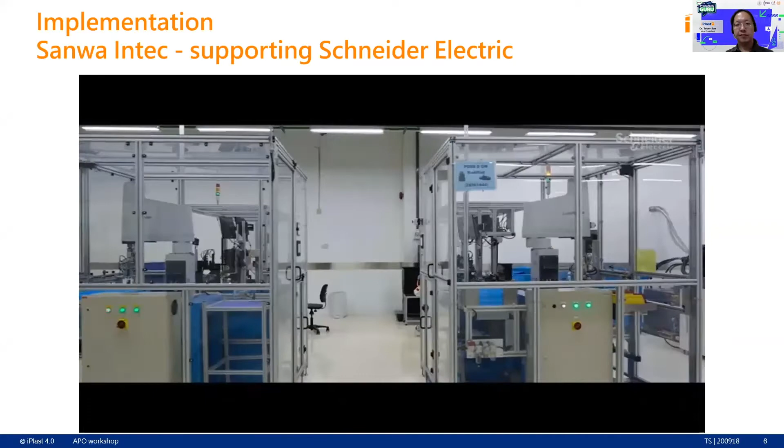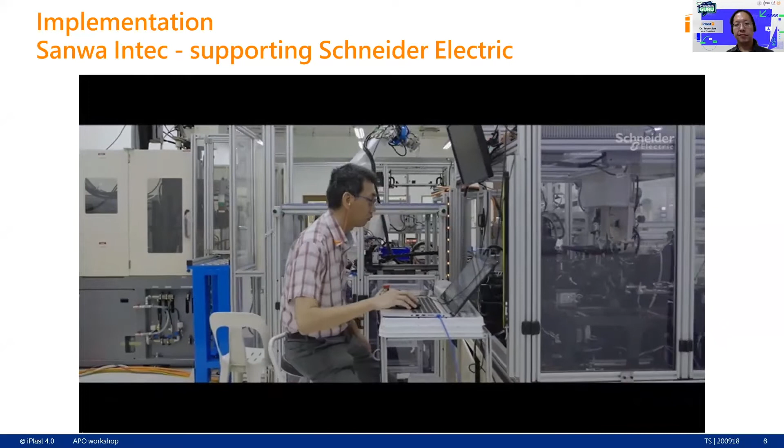I picked Sanwa because, just like BKF, Sanwa is another company supporting the automotive industry—they make automotive connectors. I show this video to demonstrate that although Sanwa is also an SME, the technology and everything behind it is very crucial.

If you look at their production, it's not a standalone injection molding machine—it's actually very integrated. They adopt the concept of a production cell, which is why you don't see a single machine there. The center of each production cell is actually the robot, because Sanwa took on the challenge of bringing in automation at a very early stage while building their production line. The experience we learned from Sanwa is also instilled in this project with BKF, which is why the Sanwa case is very important to us.

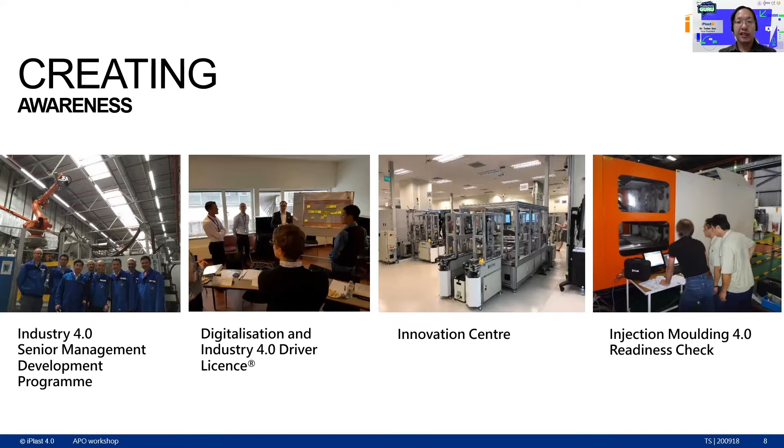So we put the readiness check at the end, because we want them to first know the basic scientific molding knowledge. After knowing that, they can go on-site and help our experts find out what's really the problem. In the BKF project, we've also been doing some readiness check, which I'll talk about later.

Usually when we talk about readiness checks, a lot of times it's very generic, not focusing on the injection molding industry. But everyone in the industry must know this requires a lot of domain knowledge expertise, because when you're tuning the machine, usually the machine won't tell you what to do.

There's no book to follow, there's no software to follow. The only thing people always come to is go to seniors, asking what should I do about this or that, because you rely on their experience. So this industry relies heavily on experience, quite unlike other industries.

So for us, leadership and organization come before technology, which is actually at the end. Of course we need technology, but actually most of the time, maybe 80%, when we're molders dealing with day-to-day problems, the first thing we do is find an expert, an experienced senior, to tell us what to do.

Also, most of the time you need to go to your boss, your superior. So that's why we think a proper leadership plus a very transparent organization should be even more important than technology itself.

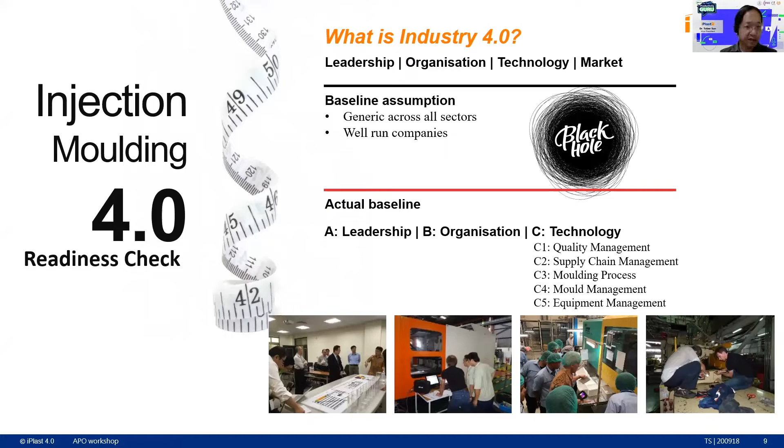So to learn about people and know about the organization, later on we will do trainings, like we said. We have two tracks we built on our own. One follows the SkillsFuture Singapore, like a skills track, so we have one for skills and one for career.

A lot of times people find that youngsters don't step into this industry because they cannot find a smooth career track. Are they going to stay on the line being a technician forever? If that's the case, and they have some ambitions, they won't go into that. But if we don't do digitalization, probably all they see is that right now they're the machine owner, and they become factory owner, and then maybe general manager.

But if we bring in the ideas of digitalization, they can have a lot of different career paths to choose. They can do a lot of smart maintenance. Why can they do that, even if they're not from a mechanical or electrical engineering background? Through proper training—and to be honest, a lot of times now maintenance doesn't require so much knowledge about mechanical or electrical systems.

So with the proper training tools and a very clear career path, we're hoping to bring more new blood in. By having a learning factory and a learning track within iPlast, we hope these two can help improve a lot of business things.

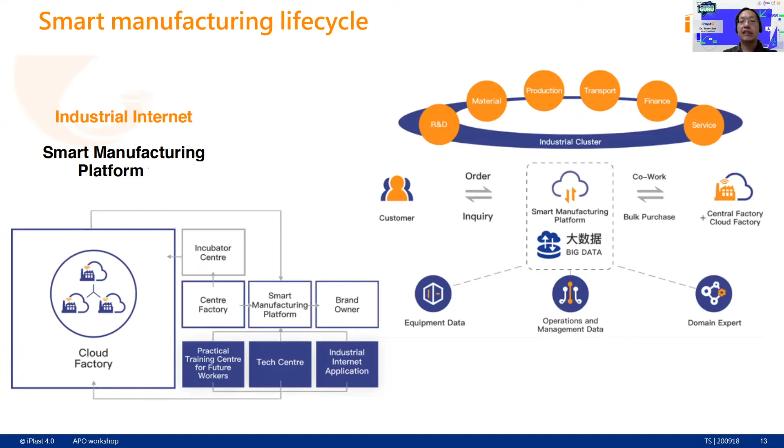Following this, we are building up our own factory. It's like a household shared factory. If you have an order, you can just come to us, and we think about how to fulfill your order. If you have equipment that is not currently in use, sitting there doing nothing, we help you get the order.

And if you are a financier, you have money but you don't know how to spend it to get profit, then we let you know how to invest in this platform and get your profit. This is what we've been doing in China. We're experimenting with this right now.

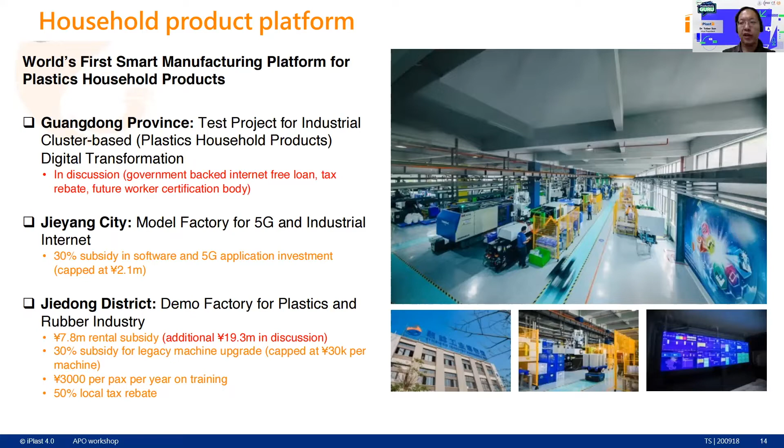But actually, for these 2 bosses, they are in very different positions, but the common goal is the same: they want to bring digitalization into their company. You can have one luxurious approach, and you can also have a 1-screen approach. Both methods will all help the company grow, of course, in different ways.

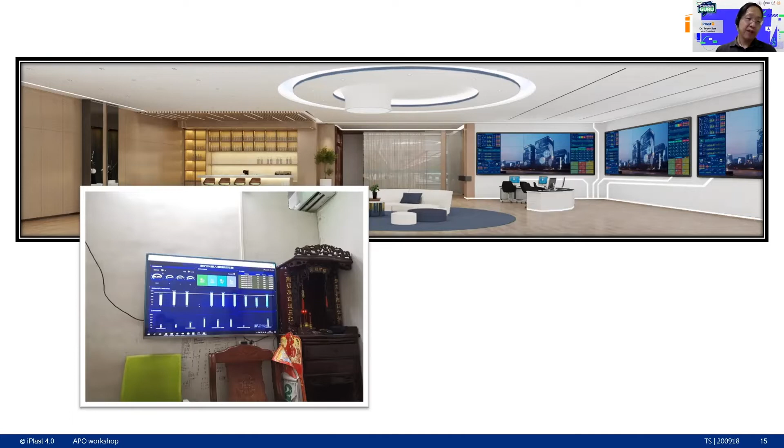So here's a short video of that platform that we're trying to build.

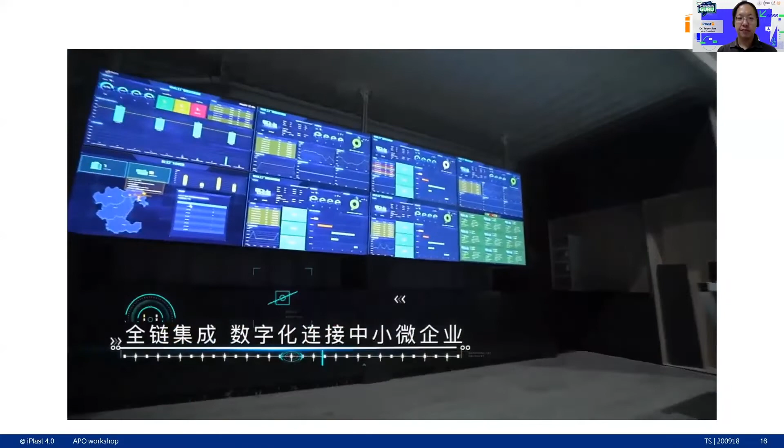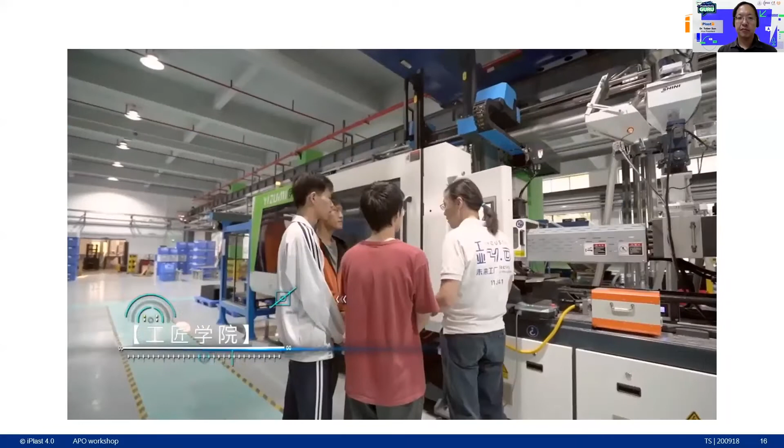So then pretty much you already have the idea of what can be done and what is the capability of the ecosystem. I don't want to talk about the company, because one company alone cannot do much. You have to have the ecosystem behind you to do that. Same thing about this project as well.

So here are the different missions, their jobs for different groups within the BKF project. You have APOs. APO is trying to find what is the expert in this area, so that it can assist with the demonstration project. So this is the job of the APO in this project.

And when APO designated iPlast, what we've been doing is having the consultancy and training in these areas. And of course, because BKF is using Engel machines, we find Engel as our partner together to support BKF. So we are focusing on software, and Engel is helping us with the hardware.

And since this is a demonstration project, the idea is to give an example, so that the local APO, the NPO, can have the understanding of how to distribute these successful experiences to other industries, to other regions. So for us, the most important group in this project is actually the FTPI, because later on, they will have this mission.

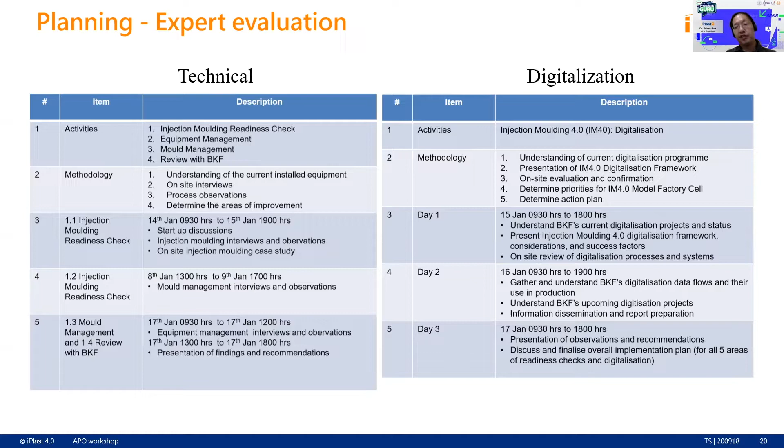So this is the first expert evaluation that we've been doing at the very beginning. Then what are our observations? Of course, the best thing is that BKF has already developed a lot of digitalization systems in-house, and they already have a lot of visualization boards.

Sometimes people think the board is only a decoration on the wall, which is of course very pitiful because they are not using the information inside. But sometimes it's because you are putting information designed for the managers - if you put it beside the technician, that's not designed for him. Of course he has no intention to use it because it won't help his work.

So it's very important to have the correct dashboard showing to the correct personnel. And also, good software can also send messages to the desired personnel, so the alarm signal is also very important. We all know about spam mails - if you receive warnings that aren't designed for you, that's no use, and people stop using it. That would be very pitiful.

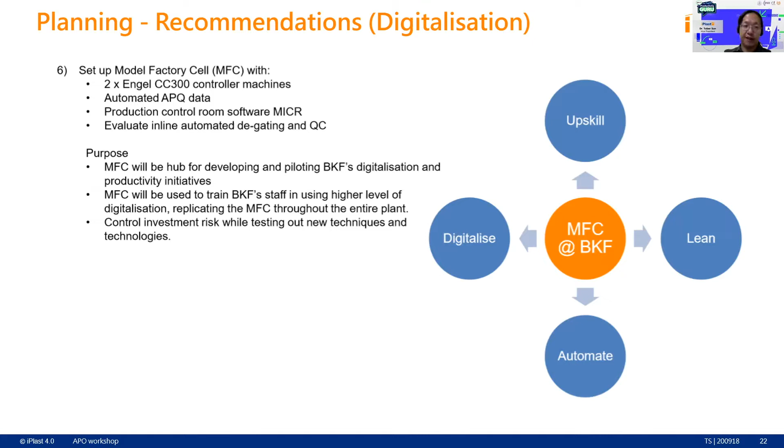And of course, when we talk about digitalization, we always need summarized information, because getting data doesn't mean anything by itself. If we understand what the data means, it becomes information, but most important is we want to use this information to achieve data-driven decision making, because the seniors need to make decisions based on that.

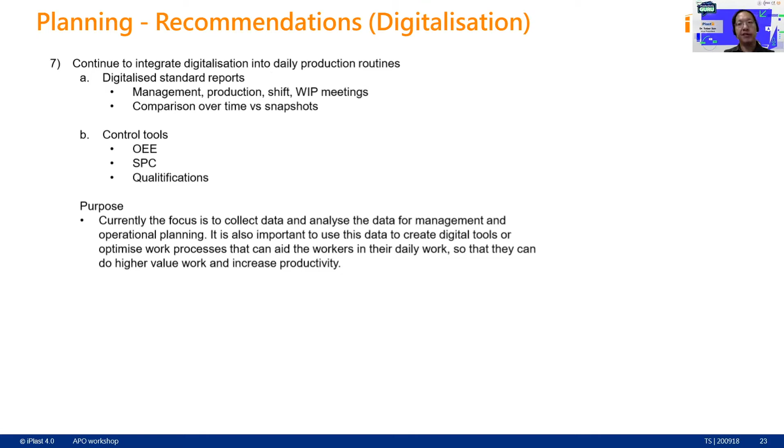So this is why we want standard reports for the management - how is the current condition of production? That is very important on this approach. Later on, by doing the readiness check survey, we understand what their baseline current stand is, and the baseline current situation until the ideal situation is what we are trying to approach with the action plan.

Separated by different subjects - scientific molding, what we should do about quality management, what we should do about supply chain, mold and equipment. Of course, at this stage, we pretty much focus on scientific molding and quality management, and the following things will be done one by one.

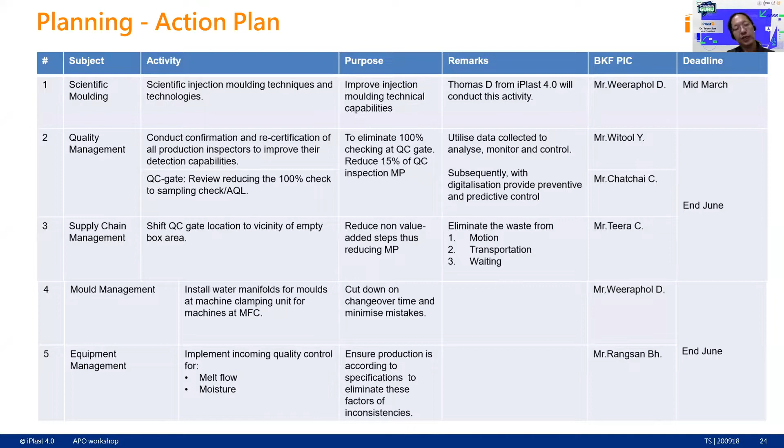Of course, today we talk about what scientific molding has already accomplished, and also the quality management. So for scientific molding training and digitalization, the final timeframe - this is not the plan, this is already the result from the past few months, about 1 year because of COVID. So things got a little bit delayed, but we still managed to finish training early this year.

Following that up, we are deploying the MICR, and through the usage and feedback from BKF, they have some added features for improvement - parameter syncing, and also inside BKF they have a lot of experience controlling the process with control limits. So that's another thing we do, to make the control limit setting a little bit better.

So we start with training, and we are trying to train the future workers. And why? Because if you want to do smart manufacturing, the machine won't operate on its own - you still need future workers to do that. So this is our goal, to do the training.

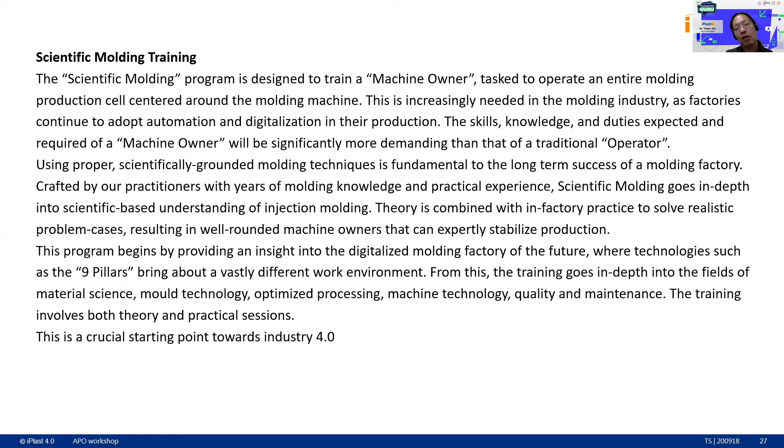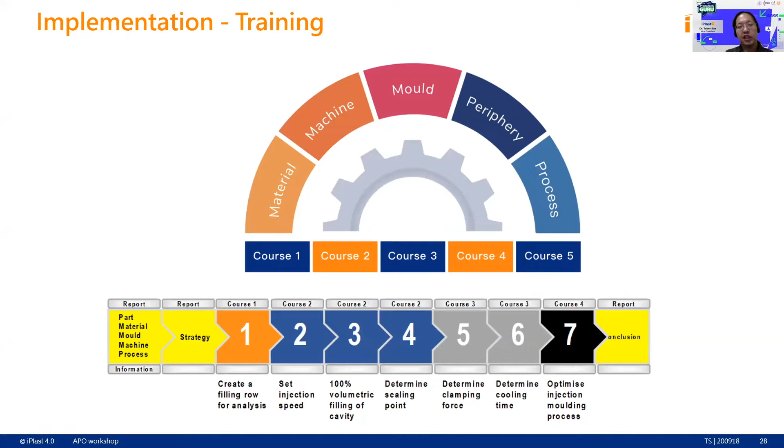He knows big and small about everything surrounding the machines to make it work. So we are trying to train a future worker who thinks of himself as a machine owner. That's the goal of our training. The training is composed of different categories, from material to process to mold. I won't go into the details, but it's separated into different courses, from easy ones to the difficult ones. Through the training, they already know when they tune a machine, when they change something, why they're doing it. They know the reason. So this is the idea behind this training.

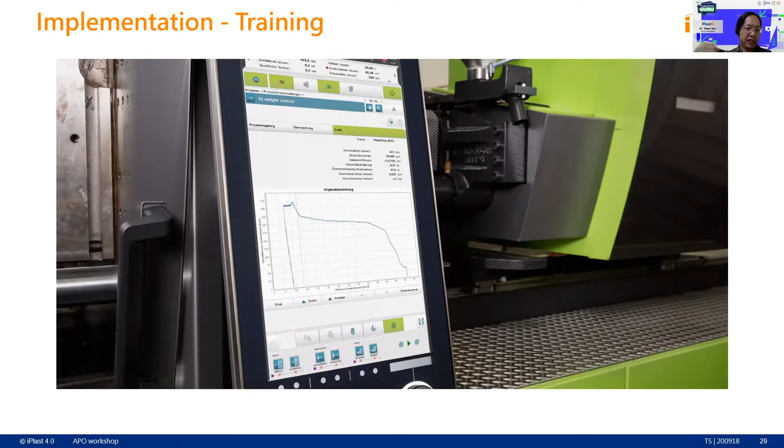So when we're doing the implementation, we take a look at the original built-up digital framework. BKF already has the material, their ERP system, and their quality control system. Our software is called Manufacturing Intelligence Control Room, and we pick up the first letters to become MICR. So the information is all gathered here.

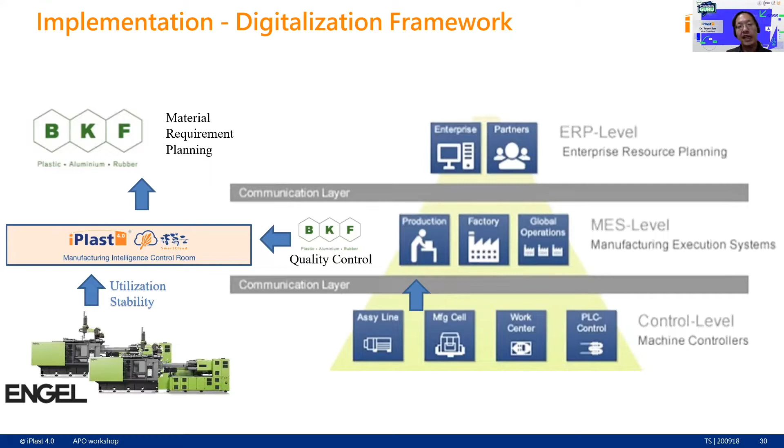So we talk about levels when we talk about digitalization. The bottom level is the control level — everything from the machine signals. The medium level is the MES level, where a lot of information is exchanged, letting you know the current condition of production. Then the ERP level is where people make decisions. On the top side is the BKF system, which they use to make decisions. The medium part is where they get the information. And we help them now also build up the bottom part, so they can have the fundamental machine information fed into their systems.

This is a very special thing we've been doing with BKF, because before, they already had a QC department with an operator. But everyone with a QC department knows you cannot do 100% checks on your molding machine — it's just too much. If you're doing selective checking, usually after molding, after 2 or 3 hours, you collect the part, then send it to quality control, do the measurement and testing, then feed back the results. By the time you feed back, you've probably already produced another 2, 3, 4 hours of products. If there's a problem, everything in between will be scraps, and you'll need to check again.

So to prevent that loss, it's very important to have a better way of connecting the QC operator with the system. Right now, on-site technicians can easily find NG products, scan barcodes, and input where the problem might be and how much is affected. Then the data is transferred through Wi-Fi to the server. So the QC personnel isn't bound to bringing the part back to the office to check. If you have a big factory, that transportation takes a lot of time. When you're on site, you can do fast checking to shorten the waste of parts and time during this data exchange — it's very crucial.

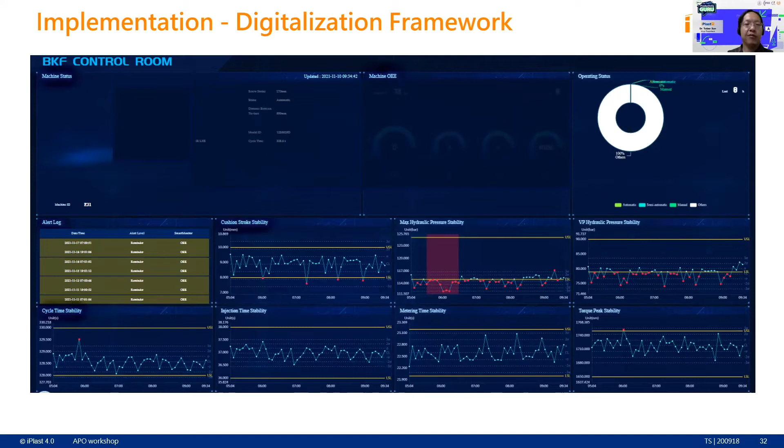We don't focus on each signal going through time, because only shot numbers are important. So later we'll have more understanding of the framework through the screens we'll show you. Of course, before everything starts, a lot of things need to be done backstage on our side, and this is also what we found in past experience. Why can digitalization not work? Because if you don't do some very painful ground-building work, then you won't have results.

For example, data can be missing, and there's no way you can understand why it's missing. Is this due to loss of signal, or is it just a stoppage of your production? So we need to first let the software know if the data is really missing, or if it's because of the stoppage. Then the value can be wrong.

I'll have one example of wrong data. So data needs to be correct first. Sometimes it's a decimal issue, unit issues, things like that. So we need to sort things out, make it very clear what pressure we're observing - screw pressure, hydraulic pressure - and what is their unit, in bar, in MPa, or in kilograms per centimeter square, things like that.

So it's very important. The next thing is that all this monitoring is based on SPC rule - statistical process control. If you don't have normality, which means you always have a mean value at the center with a normal distribution on the outside, then the SPC is not helping you much. So for all the signals, we check whether normality is good or not.

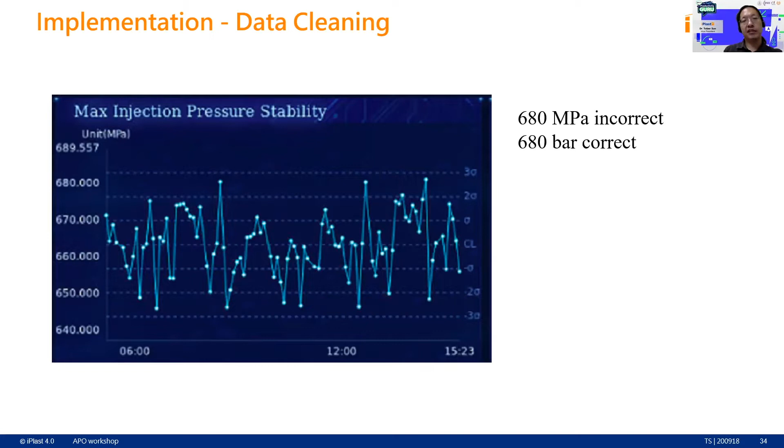And data cleaning - for example, here it shows 680 megapascal. It's an important pressure for injection molding. Actually it's 680 bar. That should be correct. So this is something we need to clean up.

Also, for the scientific molding correctness part - this is not the setting, but this is a response, the final cushion value of a certain project. When we go through it, the experts of iPlast go through all this data, we check the setting. If the outcome is around 30 or something, so the 35 cc is sort of like a 7 millimeter cushion - the screw size is 70, so which is ideal.

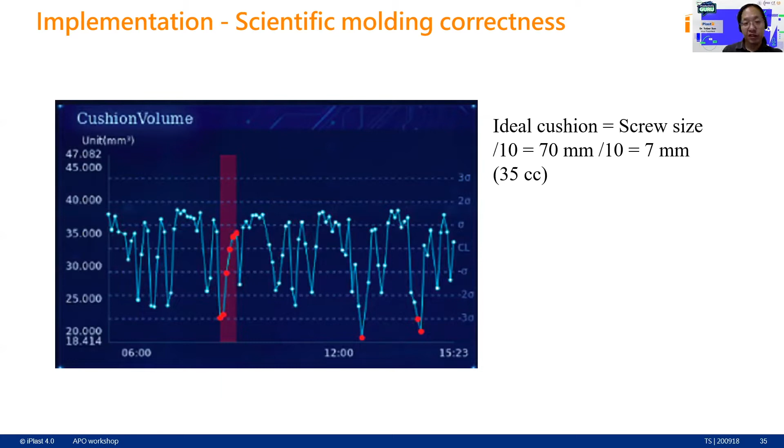If you have knowledge of scientific molding, you should know that if you have too small a cushion, your part may sometimes have a short shot or poor packing effect. But if you have a large cushion, then a lot of times the packing cannot go inside very well, so you might have some sink marks. So having a proper cushion - for scientific molding training, we want people to do 1/10 of the screw size. That's the ideal size. And we're happy that when we start to get the data back, we know that BKF is following the scientific molding approach to do this job.

Also, we monitor the trend. Like here, you see from the morning until the afternoon, injection speed starts to drop. So why is that? We need to find out. So the idea is to prevent unexpected downtimes.

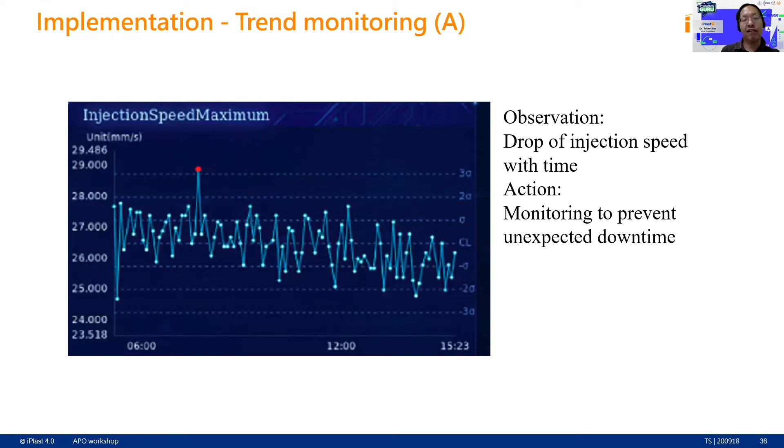If you know what that is, it's the OEE calculation, the A part. The A is availability. We want the factory to be available 100%, except for planned breakdown. Other times, we all want the machine to work, so the A must be 100%. But if you see something starts to drop, that means the machine is not stable enough, maybe something is about to break down. So this is also something we need to monitor the trend, which is the A part.

So a little bit of talk about the OEE calculation. Why is it important? Because that is the very basic thing. If we want to increase productivity, then we're thinking in this direction. And the MICR, all the information inside, is to understand what is the current OEE and where to make up that loss.

So the previous slide, I talked about the A, is availability. If we see there starts to be some drop, maybe we are having trouble, needs to stop and change some parts. That is something we don't want. So keep the runtime high, prevent availability loss. The first red square is something we like to prevent.

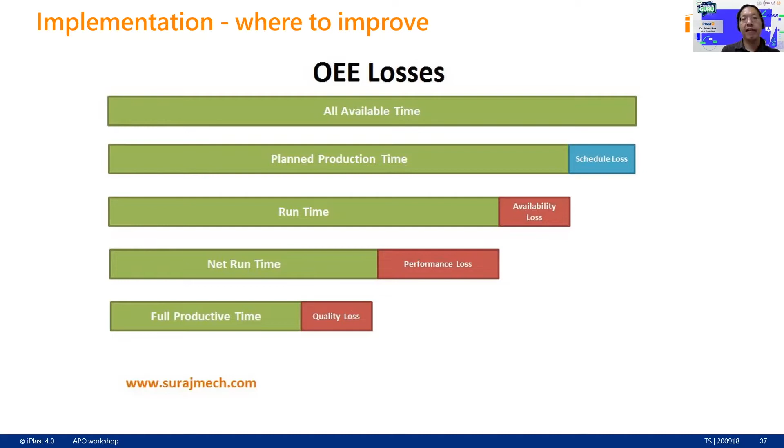And the third one will be Q. Like I mentioned, now BKF has a very small gap between production and quality control feedback. So based on this, plus having a unique way, later on in the video Kurang-san will talk about how to use the upper level and the lower level, using a very simple idea, but it's very visualized here, easy to do the setting and to do monitoring inside, to bring up the Q level, the good quality part level high.

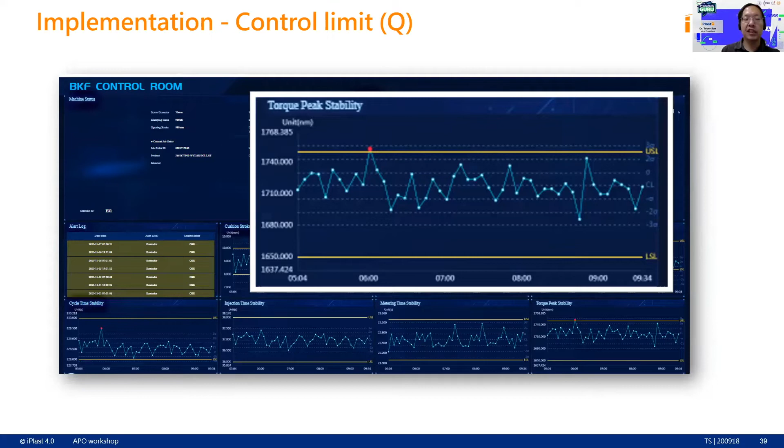So this is the third one, that just simply based on OEE, we can have improvement already. So when we combine these three things together, then we can find out actually the quality has improved by collaborating with the MICR dashboard plus the alert. So the action will be more prompt, more quickly, throughout the month. Sometimes low, but sometimes it goes high again. But by having this MICR inside, we're trying to further bring down the NG product level.

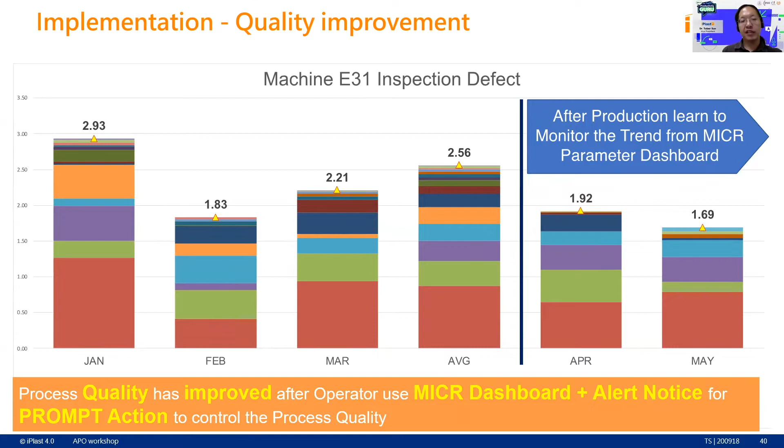So pretty much I wrapped up what we've been trying to do in BKF: start with checking and training, then see the infrastructure, do the integration, clean up the signal, evaluate the signal, then let everything run and simply use the OEE concept to boost up the productivity. So there are a lot of things we still haven't done yet. We can do a lot of optimization. We don't even step into mold or maintenance inside, but already we can see some improvements.

Of course, the challenge lies in things like COVID, but it won't stop us from achieving the goal. Actually, it's a good test, because most of the time, probably onwards, we are facing this kind of pandemic probably more and more often. So we cannot always go into the customer site. So I think later on all different parties, the factories, the equipment sellers, we all need to learn a new way of collaborating, how to use remote to check signal remotely.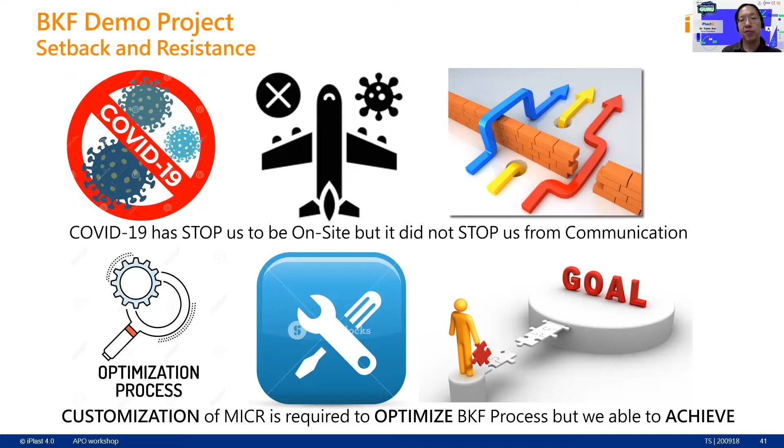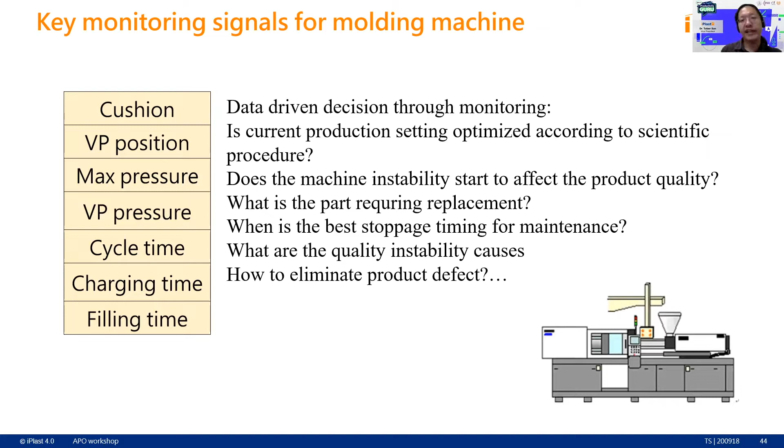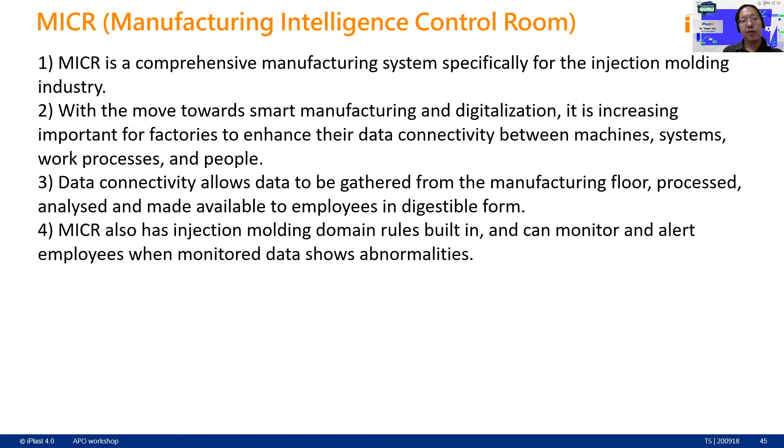So these are the questions that are being asked all the time, and we try to answer them from our control room software. I won't go into the details, but feel free to go through all the features inside to see what the software can offer—I don't want to waste time promoting our software.

One thing I want to bring out is the module, because I keep talking about the importance of the human part inside this loop. You cannot get rid of the technician. We're not there to replace you—we're keeping you in the loop, but making you do more important and profitable work.

So this is another way to talk about the expert systems. The domain expert can put in their knowledge base—when they see the figures, they have ideas, they know what's going on. Computers and AI learn from them, and we reach conclusions together.

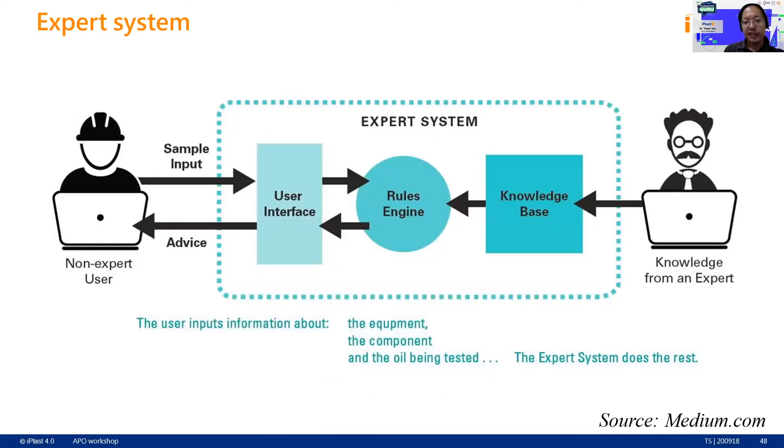It's not only being applied on injection molding—we are also applying this to other sectors. For example, the forging process is a bit like molding but slightly different. Based on the speed and temperature we're monitoring, we can combine with domain expert knowledge to also do optimization.

And also thermoforming, which is very much like injection molding, but it has its own problems and its own domain knowledge, because we're not talking about the flow of materials—we're talking about deformation and stretching only. So the fundamental physics is different, but the approach of finding a problem through scientific thermoforming to find a solution is the same.

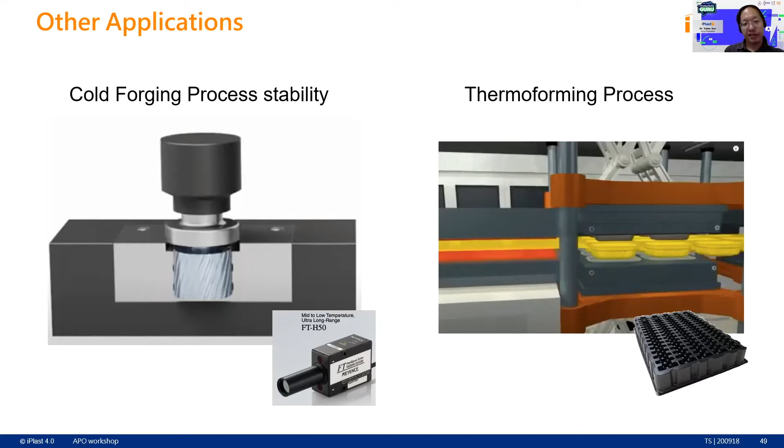We can also use the software to track production stability, because both forging and thermoforming, like injection molding, are also batch-to-batch, shot-to-shot processes. I won't go into the details here.

Later on, if we have time, we'll have some live demos very quickly to show you all this information. Remember, our system is designed to give different information to different persons.

If you are a manager, you see the reports and summaries. If you are a technician, you need to know the alerts and what's going on with your machine. And if you work on the shop floor as the shop manager, you need a full understanding of all your equipment, which one has a low OEE, and your job is trying to improve that.

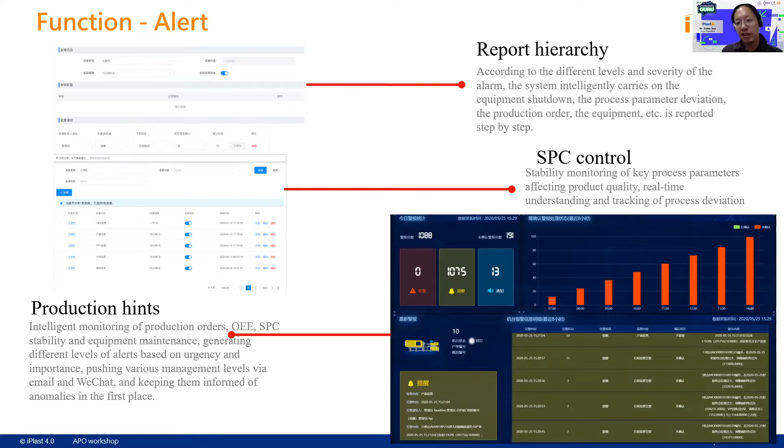So we have different dashboards for different persons, and later on I may have some time to demonstrate that.

So before wrapping up this talk, some thoughts we want to share with you from all the years we've been helping our customers do digitalization.

So most of the time we find out, we even sometimes need to compete with other software vendors, competing on price and things like that. It's naturally happens. But most of the time we think our competitor is not another vendor or consultant provider, not trainer. No, the resistance is always from inside our client.

We have senior employees, and the knowledge behind that is very crucial. But during the time of their training, building up their knowledge, we didn't have digitalization tools at that stage. We have all the data inside, so they are learning not from the correct scientific molding source. But they've been using it, and they keep correcting their understanding from the failures they made. So the experience is crucial, but because they lack the tools at their time, they probably cannot follow the current trend. But we still want to keep them because their experience and knowledge is important.

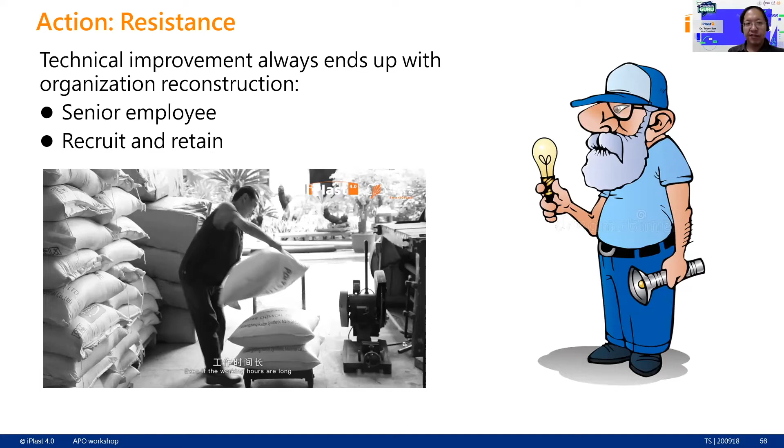So we don't want them to reject this trend and become a resistant force. We want to keep them in the loop, letting them know that by taking this, they can have more understanding of their work and work better. This is always our idea. So that's the first thing about the resistance.

And the next one is the pilot trap. Like the BKF project, it's a model factory cell, it's a pilot. It starts at the beginning, but a lot of times if you don't do the readiness check, you don't fully understand the goal of the management team. Even with the BKF project, it's not fair because the idea was to become a demo, but actually we did not talk too much. If BKF is a standalone company, they may have their own goals of improving, so it's pretty much not just a demo but about improving something.

If you don't collaborate and communicate with the management level about their ideas first, then at the end you buy things, you spend time on training, but the results are not what the senior management level wants. Then after the pilot, after 2-3 machines, everything stopped. You don't have a second phase, and then there's no Industry 4.0. So there's something we need to think about.

So before starting the project, we need to do a thorough study, making sure the company doing this understands what the goal of the top management is. That's very important. So at the end, the project results, they're going to approve that. That's very good because once they approve it, you can have a second stage. If you don't do this, you stop after the pilot. So this is what's called the pilot trap. This is another thing I want to share with you.

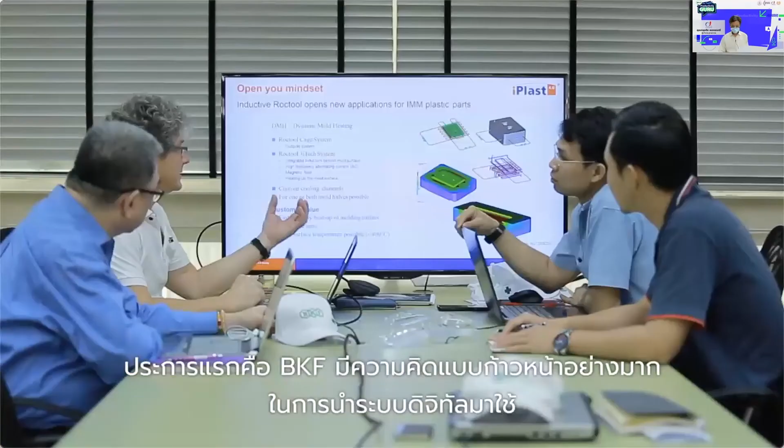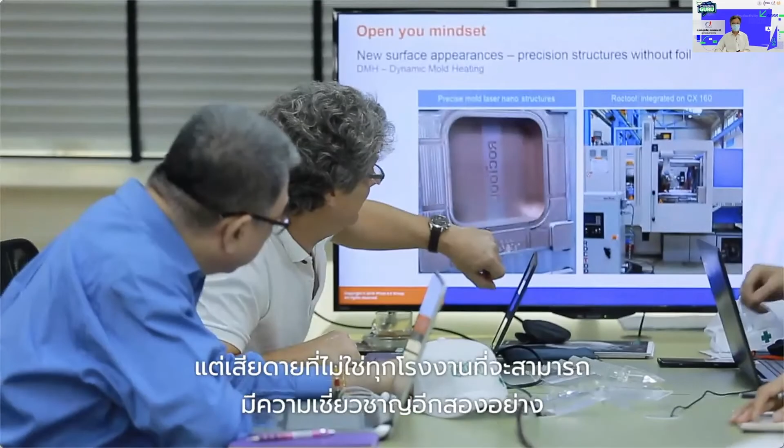BKF makes a very good candidate to be involved in this project for several reasons. First, BKF has shown very progressive leadership in adopting digitalization and has done a lot on their own to improve productivity. When it comes to digitalization, the key challenge is that you need three types of expertise: domain expertise, technology expertise, and data expertise. Many factories have domain expertise, but unfortunately not every factory has the other two.

So iPlast hopes to assist all these factories to build up their technological expertise as well as their data expertise. Once they have a certain level of expertise in all three areas, digitalization will be much easier for them.